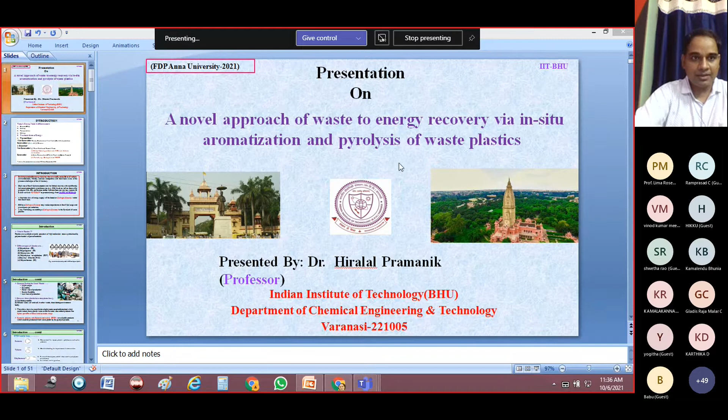Before I go to my topic, I would like to request permission to share my slides, ma'am, because I have a PPT. Thank you, ma'am. I'm sorry, I thought I had made you presenter. Now it is activated. All right, ma'am. I hope my screen is visible. Is it possible to make it full screen, sir? Yes, ma'am, I'm doing that. Is my PPT visible, ma'am? Yes, it's visible, sir. Okay.

So before I start my lecture, I'd like to thank Professor Lima Rose Miranda, ma'am, for giving me this opportunity to deliver this lecture in this faculty development program on material and techniques for the treatment of waste. I have selected this topic keeping in mind the theme of this FDP program, waste management. So I thought waste to energy would be a good choice. Basically, the waste here is plastic waste.

So the topic of my presentation is a novel approach of solid waste to energy recovery via in situ aromatization and pyrolysis of plastic waste.

So, when you are talking of waste management, there are many options. There are various types of waste generated, either domestic or industry, right? Domestic waste is basically considered as municipal solid waste. Industry also counts a lot, and all this waste pollutes either air, water, or land in various means based on the nature of the waste.

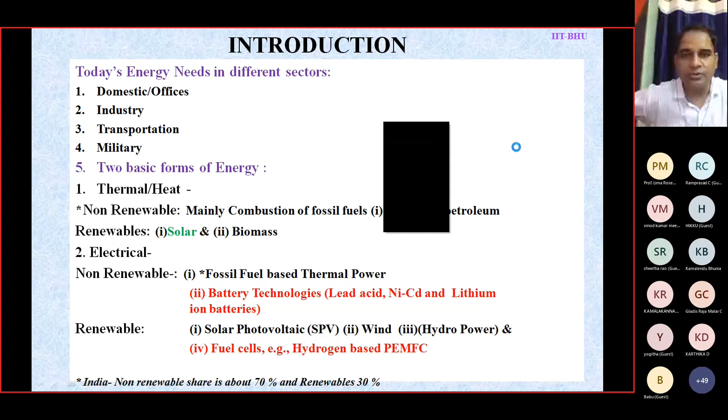So heat energy or thermal energy is basically derived from renewable or non-renewable sources. Non-renewable is basically the fossil fuels that we know: coal, petroleum, or natural gas. If you talk about renewable, solar or biomass: for solar thermal energy there are solar flat plate collectors and solar heaters used to trap the solar thermal energy. Similarly, biomass is a renewable form; we can have energy from biomass after combustion. So these are the renewable and non-renewable sources through which we can have heat energy.

The other form is electrical, again non-renewable and renewable in nature. Non-renewable is the fossil fuel-based thermal power plant. All this fossil fuel produces heat that can be converted to thermal power after generation of steam. Okay, the heat produced from combustion can be converted to steam, and then steam will give you thermal power.

Another is battery technology, that is lithium ion battery, nickel cadmium battery, rechargeable battery, that is, secondary battery. These are basically non-renewable in nature, because you have to recharge it to get back the electricity from the battery. But renewable in nature is solar photovoltaic electrical energy. If you want the renewable route, then SPVs are there, then wind energy, hydropower, right?

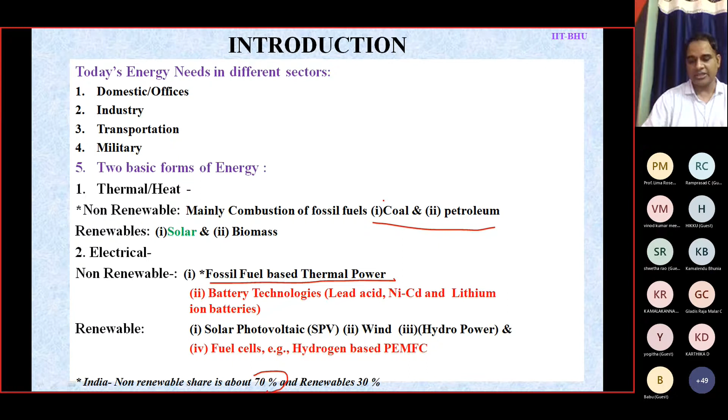Now in view of this, if you see that energy share, 70% non-renewable and 30% renewable, to reduce this dependency on non-renewable or conventional energy resources, devising sustainable energy resources is very essential, which is environmentally friendly and cost competitive with fossil fuel, and to devise such sustainable technology is really a big challenge in the 21st century.

We are talking of much research on renewable energy sectors like solar photovoltaic. Nowadays, due to the initiatives of the government, the use of solar photovoltaic has increased on a higher side. And the problem is with the cost. The government is giving subsidy. It's not that solar panel cost is low nowadays. Government is giving subsidy to promote solar photovoltaic.

So if you can produce the SPV on our own, the PN junction or material for SPV on our own, then cost will be reduced. Okay, so that's why the cost must be low. Reducing cost by giving subsidy is not a solution. The material cost has to be low, and of course it must be environmentally friendly.

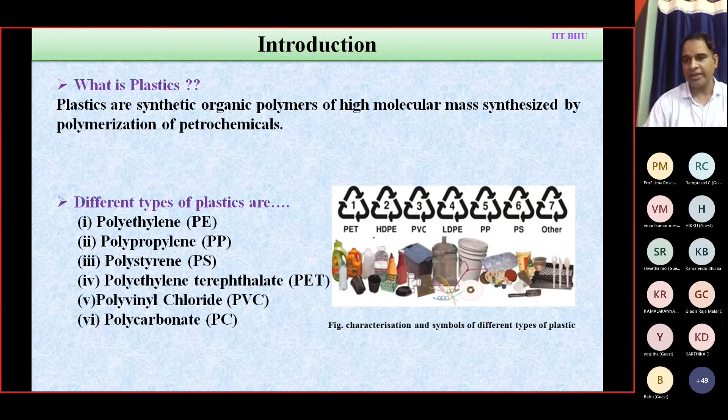The reasons behind the use of plastic, first of all, no doubt, lightweight, of course durability, faster rate of production, design flexibility, and low cost. These are the major reasons, five key reasons. That's why plastic is very much popular.

However, these plastics have many demerits. They are non-biodegradable, and as I have told, they pollute water, air, and soil, and of course damage our environment. If you talk about polystyrene, that is basically thermocol. It is manufactured from a monomer of styrene, and thermocol is used for cutlery, teacups, as well as plates.

These are basically thrown after use with municipal solid waste, and we have seen many times it floats on water bodies, not only ponds, you can see it in lakes as well as in the seas. It is found floating on the water body, and that pollutes the land as well as water.

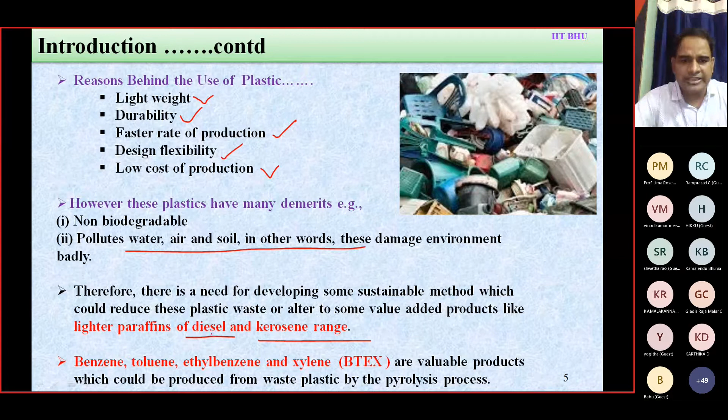Again we can break it down into smaller fragments, but if you simply supply heat and do thermal pyrolysis in absence of oxygen, it will give you random product distribution. You cannot have diesel and kerosene like fuel oil, or benzene, toluene, ethyl benzene, xylene like aromatics, which are valuable aromatic hydrocarbons. That's why I have added this term, pyrolysis and aromatization. Benzene, toluene, ethyl benzene and xylene will be produced.

Even if you analyze fuel oil like gasoline as well as diesel, we observe that benzene content is as low as possible. Why? Because benzene has soot forming properties, but toluene, ethyl benzene and xylene are considered good fuel components. For gasoline, they improve the octane number, right?

So that's why we thought, why not concentrate on conversion of pyrolysis products by in situ aromatization in the same process, right? By certain internal arrangements or modification of the reactor, we convert pyrolysis products to these valuable aromatics like benzene, toluene, ethyl benzene and xylene.

What are the uses of these four major aromatic hydrocarbons? Benzene is used for styrene manufacturing, phenol, cyclohexane, nylon precursor. Gasoline blending for improvement of octane number, as I told you. Ethyl benzene is used to manufacture styrene, which is then used for polystyrene manufacturing. Toluene is used as a solvent also, and in gasoline to improve the octane number. Not only toluene, ethyl benzene is also used.

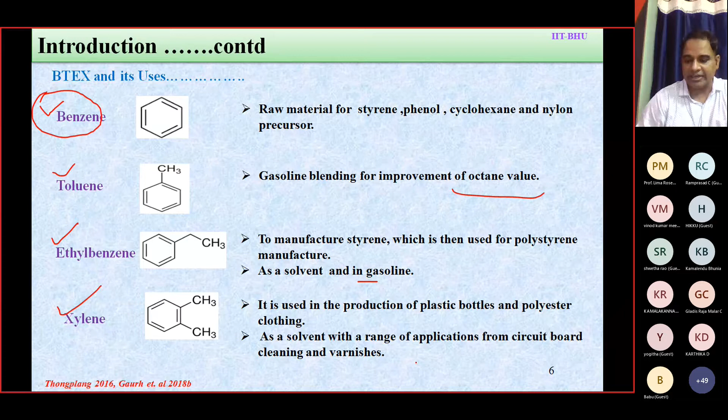Xylene is used in production of plastic bottles, polyester clothing, then as a solvent with a range of applications for circuit board cleaning and varnishes, etc. Its major use is as a solvent.

Now, if you see the current status of plastic waste disposal in our country, though this data is of 2013, this figure has gone up tremendously. Even per the 2013 CPCB report, 5.6 million tons per annum of plastic waste is generated, and only 10% is recycled; the remaining is used for landfilling and incineration.

Among these two, around 69-70% is used for landfilling, and incineration 10 to 12%. So landfilling is used for major amounts, right? In our country, we don't have a good management system to recycle it or to convert it into valuable products. I'm talking of plastic waste.

If you see the total waste, about 8 to 15% is basically plastic. So plastic waste contributes around 8 to 15% of solid waste, per Government of India 1997 data. That may be on the higher side now, around 20%, though I have not reported the present data here.

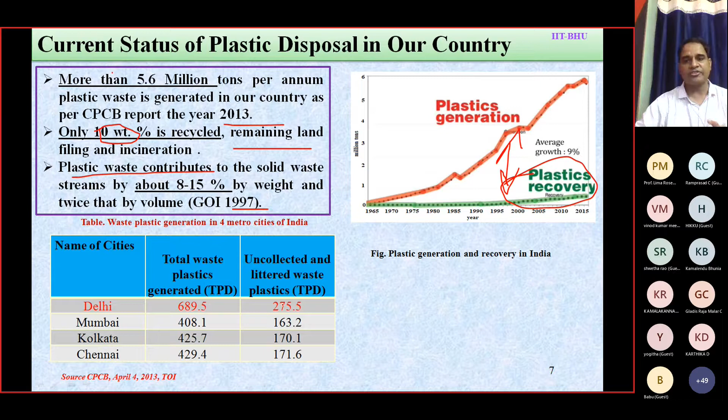And if you see the uncollected or littered plastic that is not collected, recycled or reused, it's a huge amount: 275 tons per day is littered or uncollected. So you can see there is a huge gap between plastic waste generation and reusing.

Now, I would like to give you data of Varanasi city. We are talking of the country's perspective and all; four major cities we have seen. Now, as I am from Varanasi and at IIT BHU Varanasi, I am much more concerned for our city. We talk about the world scenario, the country scenario, but we should know about our local place as well, where we are residing.

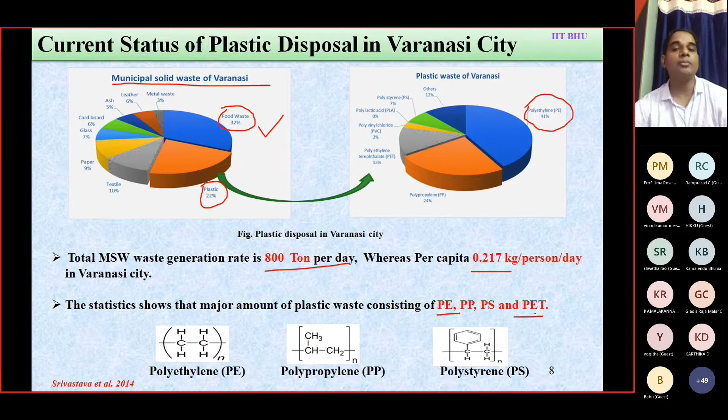Now, municipal solid waste of Varanasi, on a tons per day basis, 800 tons per day of waste is produced. It's a huge amount, and per capita 200 grams per person per day in Varanasi, a huge amount again. 200 grams of waste generation. The statistics show that the major amount of plastic waste consists of polyethylene, polypropylene, polystyrene and PET. That's why we concentrated on those 4 types. But again, we did some literature review on whether those plastics are possible to convert or not. I shall discuss that in the next slide.

Now think of the mountain areas. I have talked about the national scenario, then Varanasi. Now if you look at high altitude mountain areas, those areas are also not spared; they are also greatly affected, right? Mountain areas and major cities of India at high altitude. Plastic bottles are thrown by tourists, local residents and military people.

However, no studies on plastic waste generation at high altitude have been reported or found in open literature. Only some articles were published in 2018, like this headline: a Himalayan mess, growing garbage pile a threat to mountain ecosystem.

And this information: on World Environment Day, 5th June, volunteers of 200 organizations picked 4 lakh pieces of plastic waste in a 2-hour operation from Himalayan states like Sikkim, Meghalaya, Tripura, from north to north east, this region. If you see all the states, 4 lakh pieces, a huge amount, right?

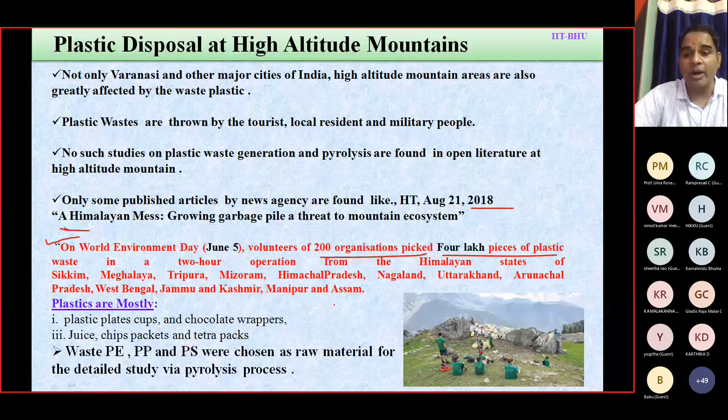So tourists, local residents and military people are the major threat, meaning they don't take care of proper plastic waste disposal. They throw it here and there. Most of the plastics are cups, chocolate wrappers, juice and chips packets, Tetra packs, etc. So here also PE, PP, and polystyrene are found. So not only major metropolitan cities of India, but also Himalayan areas are greatly affected. Okay.

So plastic waste management techniques: if you see the methods, landfilling, as I already told you, is a very high amount, 79%, 12% incineration, and 9% recycling. So the major amount is landfilling, and that has many problems: it requires large space, is non-biodegradable in nature, pollutes water and soil. The energy content in the plastic we cannot recover after disposal.

And the last point is very scary, because cows and dogs are often seen scavenging garbage dumps, which is harmful to animals. And many times we have seen cows die due to consumption of plastic with some food stuff, right? So that's why we have to reduce landfilling of this plastic waste as much as possible.

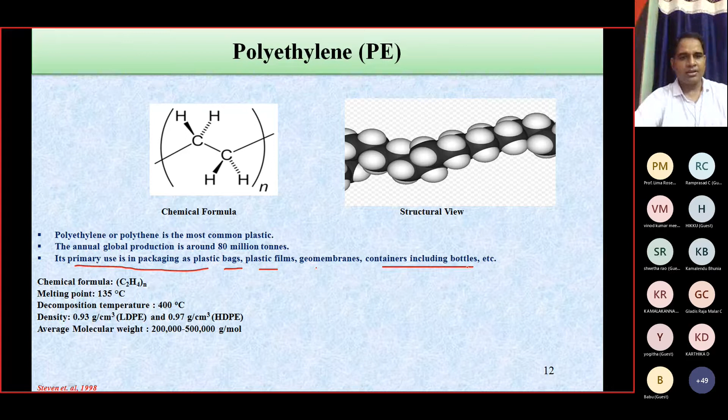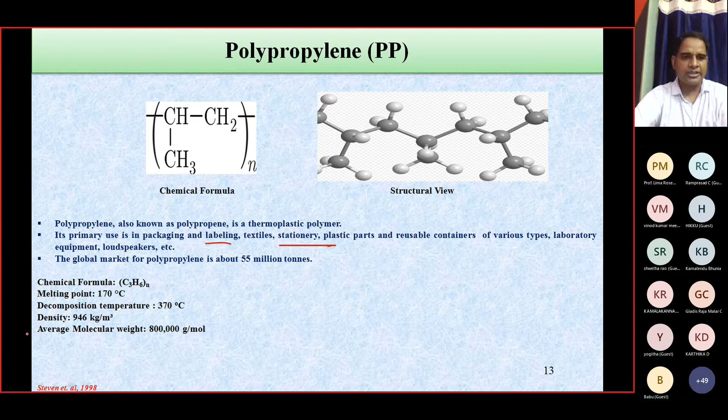As I have told, three major plastics are found: polyethylene, polypropylene, and polystyrene. So this is the structure, chemical formula, and the structural view. The products from polyethylene are basically plastic bags, plastic films, geomembranes, containers including bottles, etc. Similarly, this is the polypropylene structure. Stationery, textiles, labeling, packaging, and reusable containers are produced from polypropylene. And these are some properties of polypropylene, just like polyethylene.

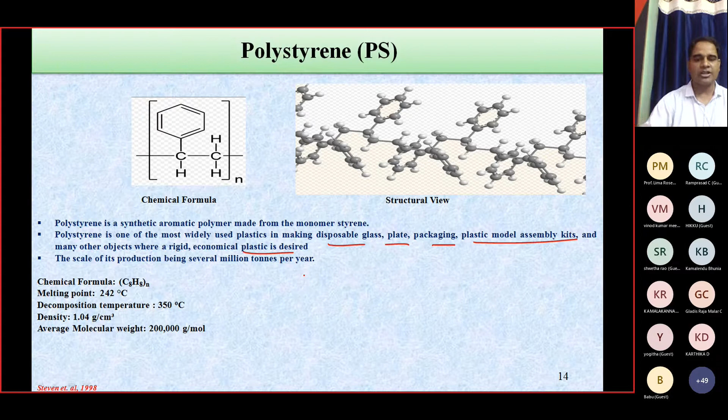Next is the polystyrene structure I have shown here. Disposable glasses, plates, packaging, plastic model assembly kits, and many other objects where a rigid and economical plastic is desired use polystyrene. When heavy, delicate items are transported from one location to another, we have seen thermocol being used. When electronic or delicate items are transferred, a large volume of this polystyrene is used for packaging, and that goes to the environment if you do not recycle it, reuse it, or convert it into suitable products.

What are the mechanisms of polymer decomposition? Pyrolysis follows four steps. First is the chain initiation reaction. If you have a polymer, there will be cleavage of bonds, forming radicals. The dot means it is forming radicals. So this is radical formation from the polymer, random scission. Next is the chain propagation reaction.

In propagation, the first step is depolymerization through beta scission, which gives this radical. This radical will be converted to a smaller radical as well as some unsaturated hydrocarbons. Another route also gives a radical with some unsaturated hydrocarbon. Intramolecular hydrogen transfer happens within the same molecule: the radical moves from this position to here, and a hydrogen atom is transferred to other carbon atoms.

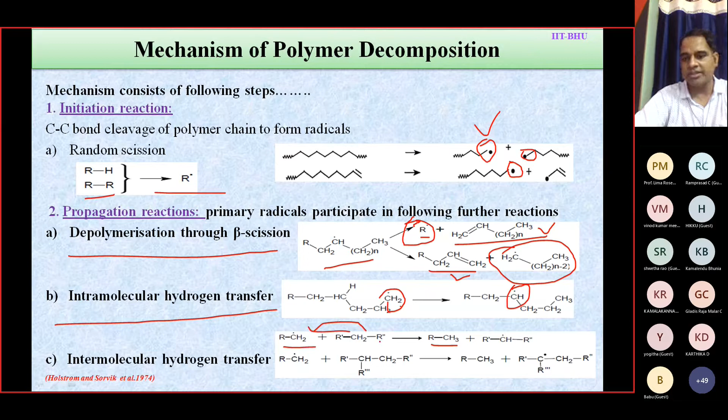In intermolecular transfer, two radicals rearrange and hydrogen transfer takes place. You can see CH2 has become CH3, so one hydrogen has been transferred from the second one to the first one. Next is chain termination. If there are two radicals, they will form another compound that terminates the chain, giving the final compounds through the different reactions shown here. I am not going into detail on that.

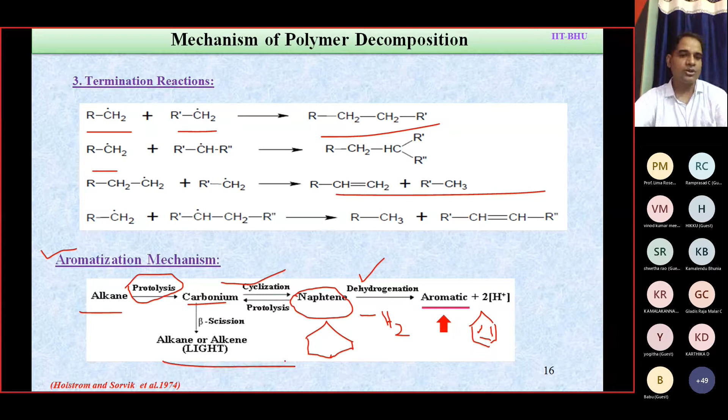For aromatization, if you have an alkane, protolysis takes place, giving a carbonium ion. The carbonium ion has two paths. First, cyclization then dehydrogenation. Cyclization gives a naphthenic saturated ring structure, a benzene-like structure but saturated, like cyclohexane. Dehydrogenation removes hydrogen and gives aromatic hydrocarbons, for example benzene. Or beta scission of the carbonium ion gives alkanes or alkenes, unsaturated hydrocarbons.

Next is the selection of plastic. We should know the basis for whether you can go for pyrolysis or not. Let's look into it.

Polypropylene is also good for pyrolysis and requires a little higher temperature, right? And thermal pyrolysis gives a waxy product, right? But we can manage using catalytic pyrolysis, right? We can have a good quality of oil. So polypropylene also is good for pyrolysis. And now

polyethylene terephthalate, that is PET, if you look into it, it is not suitable. Why? It produces benzoic acid. Benzoic acid solidifies at the neck or condenser line, which chokes the vapor path or vapor lines, and it is very dangerous, right? So from a safety point of view, it's not recommended for the pyrolysis process directly. Only after design modification it could be done. So polyethylene terephthalate gives benzoic acid, that's why it is not recommended.

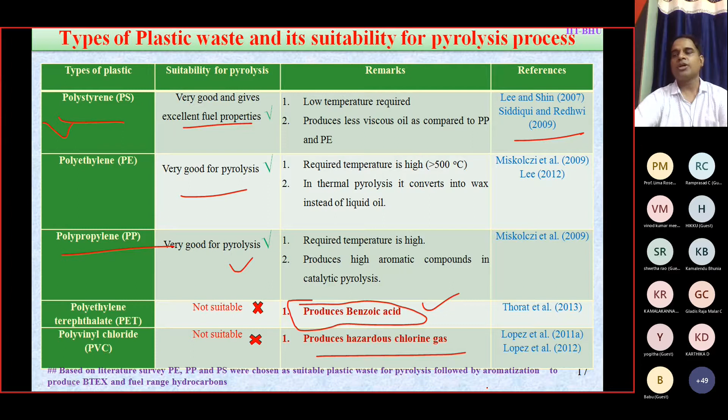Polyvinyl chloride produces chlorine vapor. Again, it is not recommended due to the escape of chlorine into the environment. So based on literature, as I've said, polyethylene, polypropylene, and polystyrene were chosen for pyrolysis followed by in situ aromatization to produce diesel range liquid hydrocarbon, along with some major aromatics like benzene, toluene, ethyl benzene, and xylene.

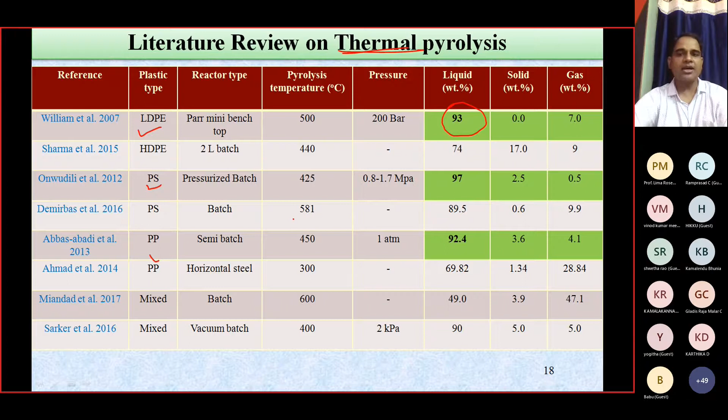So these are a few literatures. If you see here, it is mainly for thermal pyrolysis. I have highlighted with green color polyethylene, LDPE, polystyrene, and polypropylene. What is their output? As a liquid product, 93%, 97%, and 92%. More than 90% in each case, with a little amount of gas and a very small amount of solid residue. This is for thermal pyrolysis of these three types of plastic waste.

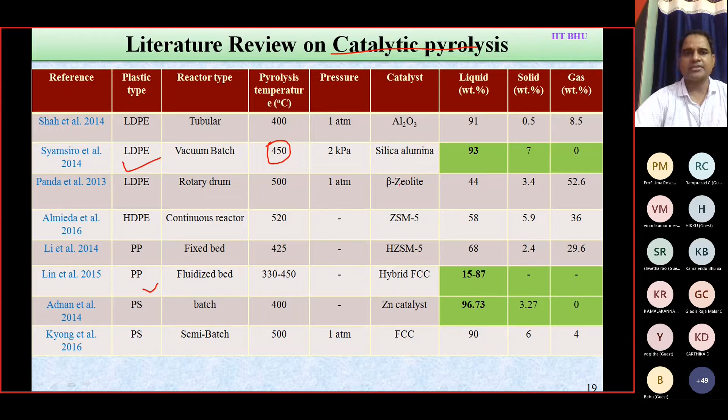Similarly, for catalytic pyrolysis, from the literature survey it is seen that LDPE, low density polyethylene, gives 93%, right? Pyrolysis temperature is 450, and then polypropylene, 330 to 450, and polystyrene, 400 degrees Celsius. All these are in degrees Celsius. And here you can see liquid also 93%, 15 to 87% for polypropylene. This range is given as available in the literature, and 96% liquid oil is obtained.

But this paper has not shown the qualitative analysis, that means in terms of benzene, toluene, ethyl benzene, and other hydrocarbons like paraffinic hydrocarbons and naphthenes, not shown. So only quantitative analysis is given here.

Now from this overall literature survey, we observe that there is good possibility of research on conversion of plastic waste to aromatic hydrocarbons, benzene, toluene, ethyl benzene, and xylene rich fuel, which is suitable for a generator set, because when those aromatic hydrocarbons remain in the oil, it is good for a diesel engine, right? But as I have already said, the benzene percentage is a little high, so we have to reduce that percentage either by some separation process or by some conversion technique, converting benzene to toluene using a suitable catalyst or reactor bed arrangement.

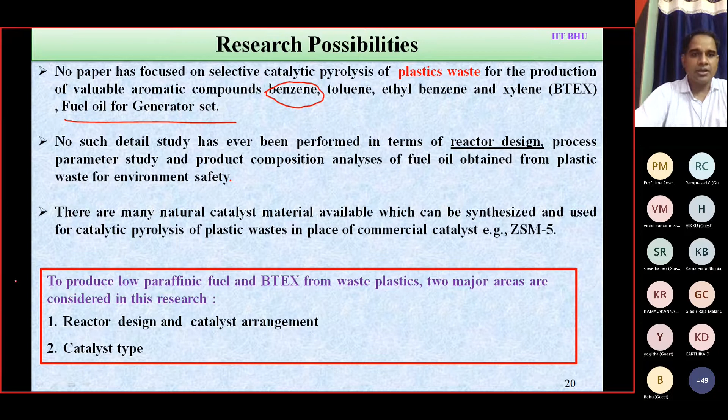Second, there is no detailed study on reactor design; process parameter study and product composition analysis of fuel oil obtained from plastic waste has not been shown yet, right? In terms of reactor design. The third one is there are many natural catalysts. ZSM-5 is the widely used commercial catalyst, but apart from ZSM-5, there are many natural materials which could be recommended as a catalyst for pyrolysis or aromatization.

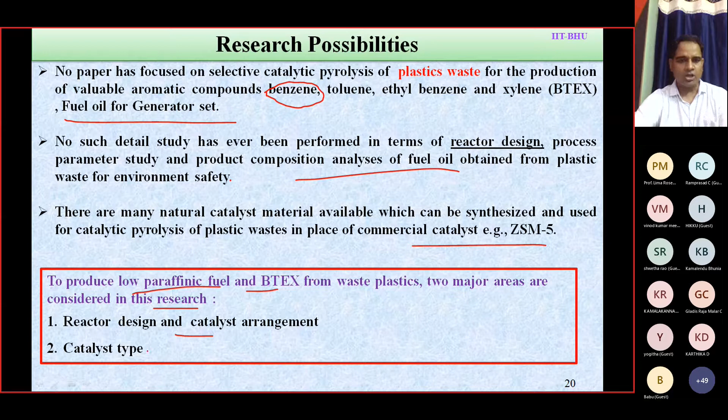So therefore, to produce low paraffinic fuel and BTEX from waste plastic, two major areas are considered in this study. One is reactor design and catalyst arrangement, and the second one is catalyst type. By modifying the design and catalyst bed arrangements, we observed a huge enhancement in the BTX content in the oil as well as the quality of the oil. And we tested catalysts, not only commercial, but also some natural materials we selected. I will discuss this in the experimental section.

So what are the objectives? Each research study must have objectives based on the gap we found from the literature and on our specific goal: design and fabrication of the setup, and then study both thermal and catalytic pyrolysis for comparison purposes.

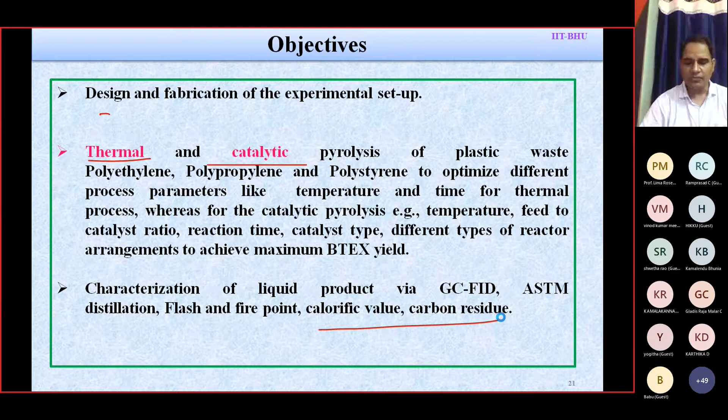If you don't have thermal pyrolysis data, then you cannot compare what is the enhancement in yield as well as quality in terms of BTEX. Then product characterization using various standard techniques: GC-FID, ASTM distillation, flash and fire point, calorific value, and carbon residue. These tests are also recommended for diesel oil or gasoline to compare with the standard data, whether it is a standard fuel or whether there is some mixing, impurities or adulteration.

Two major raw materials were used here: one is plastic, of course, and the second one is catalyst. Plastic, polyethylene, I have already told. What is the preparation of the feed raw material here? Collection, washing, drying, and shredding for pyrolysis, and the catalysts used were ZSM-5 and fly ash synthesized catalyst, or red mud and river clay. I shall discuss only fly ash here because of time constraint, as well as ZSM-5.

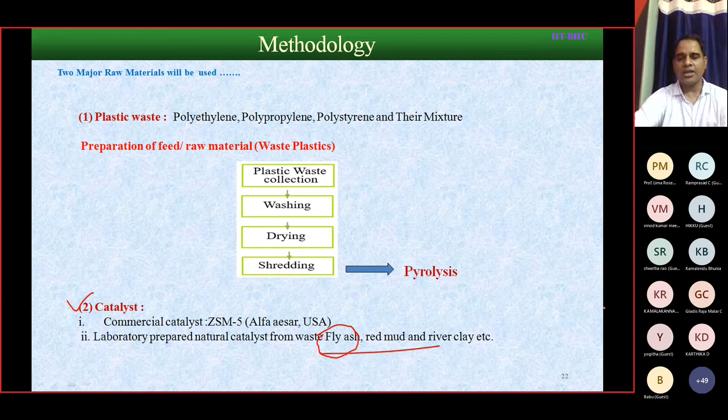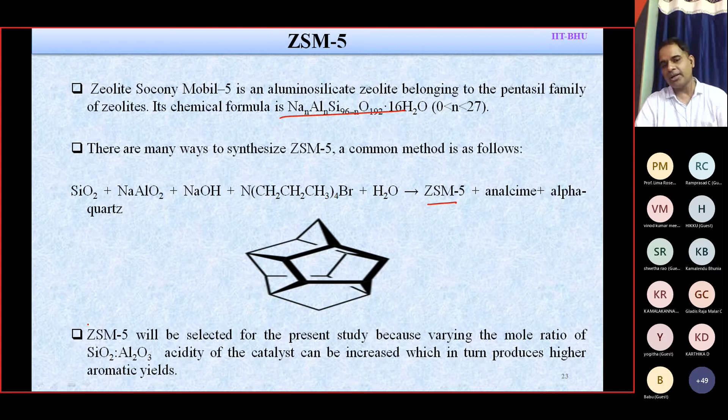Nowadays, ZSM-5 is being modified with ammonium chloride to protonate it, which is known as HZSM. So Na is being replaced using ammonium chloride in the form of NH4, which is known as HZSM-5, to have better aromatization, better alkylation and more selective products, target molecules in the process. The ZSM-5 we selected here has a fixed ratio, because with changing silica to alumina ratio, acidity basically changes. So the silica alumina ratio is also considered an important parameter.

Now for fly ash, we selected it as a raw material for catalyst synthesis or silica alumina synthesis because 184 million tons per annum of fly ash is produced from thermal power plants. The 2014-15 data shows 184 million tons, a huge amount of fly ash, in the Indian scenario. And maximum fly ash generation is in Uttar Pradesh, 24.37 million tons per annum. These are the references taken.

Keeping this in view, we collected fly ash from Panki thermal power plant. If you see the composition of raw fly ash, silica is the highest amount, 53.56, then 27.71 is the second highest amount of active constituents. Then Fe2O3, also considered a good catalyst, and MgO. These are the four constituents which play a good catalytic role. But the first two, silica and alumina, as you have seen in zeolite, so we considered silica alumina mainly as active components for the catalytic conversion.

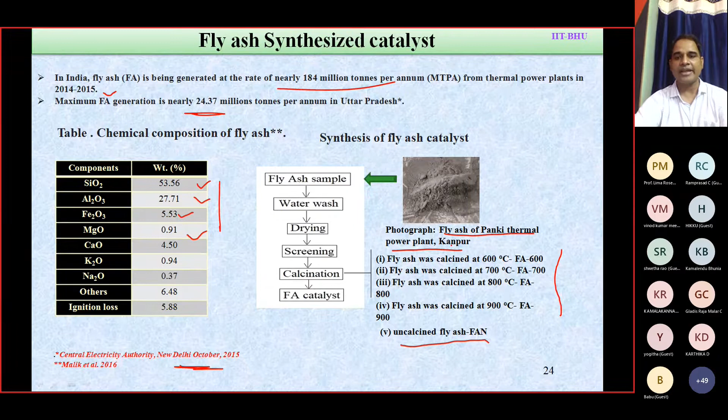What are the characterization techniques? Both the product oil and the catalyst were characterized. Catalyst characterization was done by XRD, SEM-EDAX, BET surface area and FTIR. XRD tells about the crystallinity of various active components present in the fly ash. SEM-EDAX gives information about surface elemental composition, what weight percent of silica, alumina and active constituents is present at the surface. BET gives the surface area in meter square per gram.

And from this we can interpret this physical characterization data with the products. It is presumed that if surface area is high, it is expected to give a better product, as there is better interaction, in terms of liquid or quality. Of course, catalytic pyrolysis will give you a little lower liquid yield, but quality-wise it is best for catalytic. Similarly, if you talk about gas, gas will be high for catalytic pyrolysis.

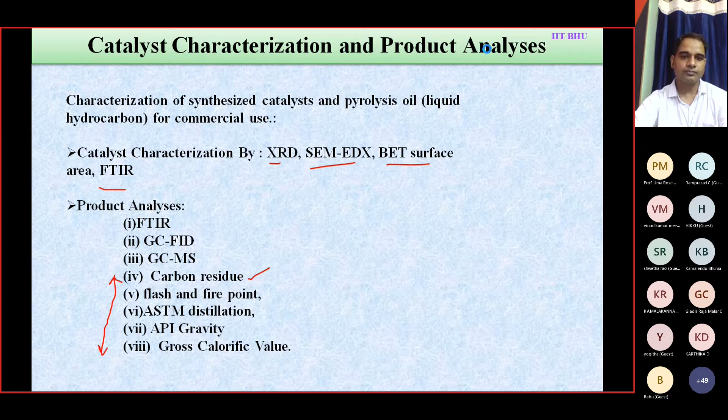Next, let us discuss the experimental setup and how we design the reactor. Many times we do the research, but we do not follow the design criteria. Simply we see the literature, fabricate the setup and do the experiments. But for any sort of reactor, we have a design criteria. So here, based on L by D ratio, residence time of the reactant and products is very, very important.

So L by D ratio we basically selected based on the various merits and demerits of the L/D range. If L/D is 0.5, then restricted flow and restricted recirculation within this reactor. If L/D is greater than 1.5, then it increases the path of recirculation. If L/D is greater than 2, then several disadvantages we can have; at least 2 impellers are required for good fluid motion. Thus we selected an L by D ratio of 1.2 to 1.5 here.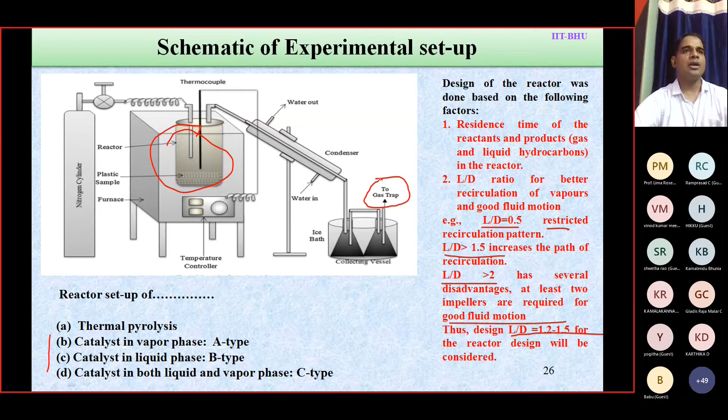So there is no chance of loss of condensable vapor as liquid hydrocarbon. The non-condensable gas was not analyzed, but it was trapped, and we have seen that it has a fuel value. It burns with a blue flame, as we observed when it was burned. So it has a calorific value and fuel value, because it is basically a mixture of methane, ethane, propane, butane, the lower hydrocarbons. So this is the reactor arrangement.

Now I would like to discuss the results and discussion part, a very interesting part. What are the products obtained from the pyrolysis of polyethylene, polypropylene and polystyrene using the thermal pyrolysis process? The second part is the same using catalytic pyrolysis, using ZSM and using fly ash, both of which we have discussed in two different subparts.

Now polyethylene: if you look into this table, what we observed during our research is that with the increase in temperature, 500 degrees Celsius, 600, 700 and 800 degrees Celsius, with a sample weight of 50 grams of plastic waste, polyethylene, at 800 the yield was very high but waxy. The yield is higher than at 700, 600 and 500, but it is waxy in nature and solidifies at room temperature.

For gas, you can see there is a little bit of fluctuation: 18, 20, then 16, and again 18.4. Why is it 18.4 again? Because of repolymerization in thermal pyrolysis, we observe more solid at very high temperature. And why is it waxy after 700 degrees Celsius, that is, at 800 degrees Celsius?

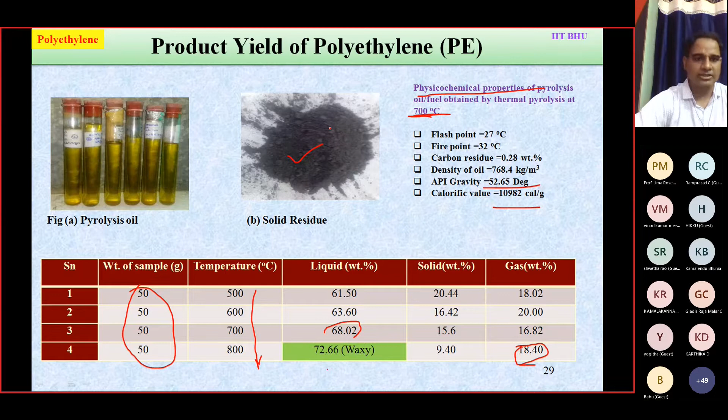From this you can say it is a light oil, because API gravity greater than 31.1 means it is basically a light oil. And the calorific value is also good; the calorific value of gasoline comes in the range of 11,000, so here it's very close to gasoline, even though it is thermal pyrolysis, maybe because we maintained the L by D ratio properly. This is the solid residue, not catalyst, left over after pyrolysis, and this is the pyrolysis oil at 700 degrees Celsius.

Similarly for polypropylene, at 800 the yield is again quite high, higher than polyethylene. We got 86% liquid oil here, but the problem is that at this high temperature it is again waxy. I have discussed the reason: because of the high temperature, the vaporization rate is higher, so it goes into the vapor phase and then to the condenser without further conversion.

However, at lower temperatures, 700, 600 and 500 degrees, they get sufficient time for further conversion. That's why we get a little higher liquid oil at 700 in comparison to 500 and 600, and it is liquid in nature; the oil is not waxy at 700, and similarly at 600 and 500. That means lower paraffins are present in higher amounts in these three types of oil.

Okay, but if you see the BTX analysis, thermal pyrolysis is always giving low BTX content in comparison to catalytic pyrolysis, which I shall discuss in the catalytic pyrolysis section in comparison with thermal pyrolysis. So 700 again is the optimum temperature.

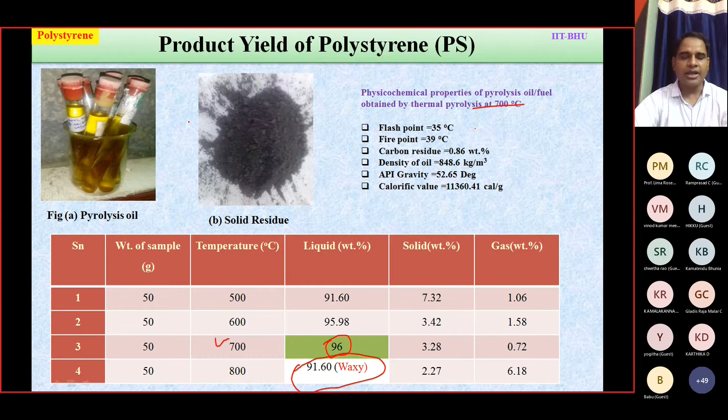But the color, you can see, is a little more brownish because of the styrene monomer. What we have observed in thermal pyrolysis of polystyrene is that it mostly gives the styrene monomer, and the monomer remains in the product oil. That's why its color becomes more brown in comparison to oil obtained through pyrolysis of polypropylene, meaning dark brown, and that is the light brown polyethylene, and you can see polypropylene is almost clear, right? Water-like color.

So catalytic pyrolysis, if you see the catalytic pyrolysis with ZSM5 first. Before we went for the catalytic pyrolysis, we took 50 grams of feed total, and maintained feed to catalyst ratios of 10:1, 20:1, and 30:1 for each, starting with polyethylene. Then what we observed was that liquid yield was 58%, the highest percentage here in the catalytic pyrolysis, for 20:1. Here also 81%, and 86% for polystyrene. So as the liquid yield was highest for 20:1, we took it as the optimum feed to catalyst ratio for catalytic pyrolysis using ZSM5.

Okay, all three comparisons I have shown here. If you compare with the thermal, you can see that the gaseous percentage is increased, and we know naturally the gas obtained is higher in the case of catalytic pyrolysis in comparison to thermal.

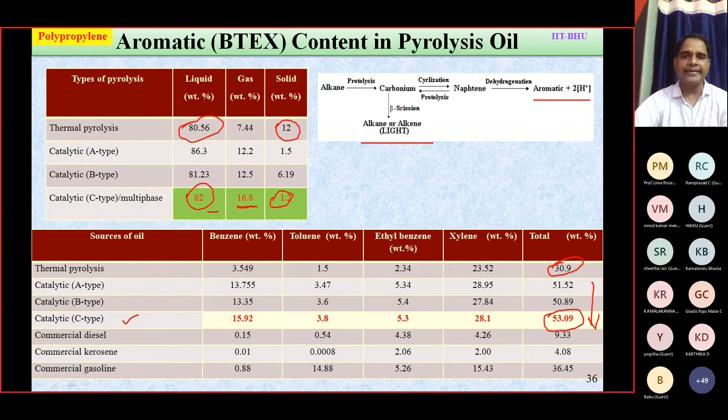So already the reason for such change I have discussed, and this is the reaction: alkane to carbonium ion due to the protolysis, then cyclization, dehydrogenation will give you aromatics, and then alkane or alkene, light alkane or light alkene due to the beta scission. Already I have discussed this, how we are getting these different types of aromatics.

Similarly, polystyrene gives 96% liquid yield here, and if you compare with the C-type multiphase, 83%. Though liquid yield is low, quality-wise it is good, because you see 26.86%, the highest amount of aromatics BTEX, is found in comparison to thermal pyrolysis. For it, it was 96%, but BTX is low, only 13.58. If you do multiphase pyrolysis, liquid and vapor phase, then 26.86%, it becomes double.

And liquid is, I told you, low because it has been converted to gas. Gas means valuable fuel gas, and that can be recommended as a fuel. Before I go to the catalytic pyrolysis, I'd like to highlight one thing. The gaseous fuel which we are getting from the catalytic pyrolysis of C-type is a very high amount. And that gas can be used after trapping as a fuel, store it and use it as a fuel,

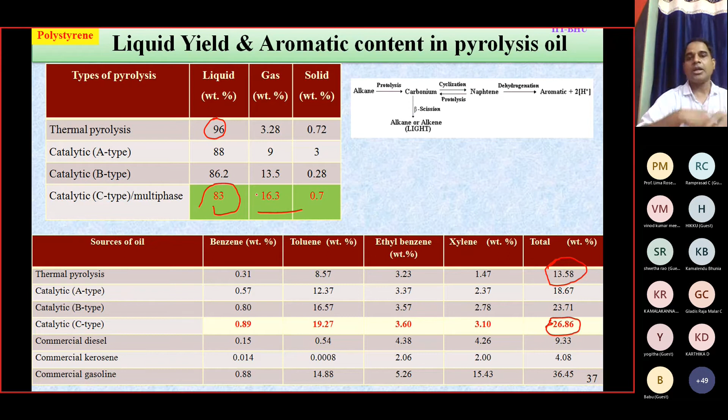or this gas can be used as a fuel for combustion, and the heat which will be generated can be used for pyrolysis of this plastic waste. So this process will be sustainable and self-sustained, this technology. No need of an external heat source. The fuel gas which you are getting, you burn it and use it in the system for the multiphase pyrolysis. It is the best process, so I recommend it for multiphase pyrolysis of plastic waste. Okay, so a self-sustained process.

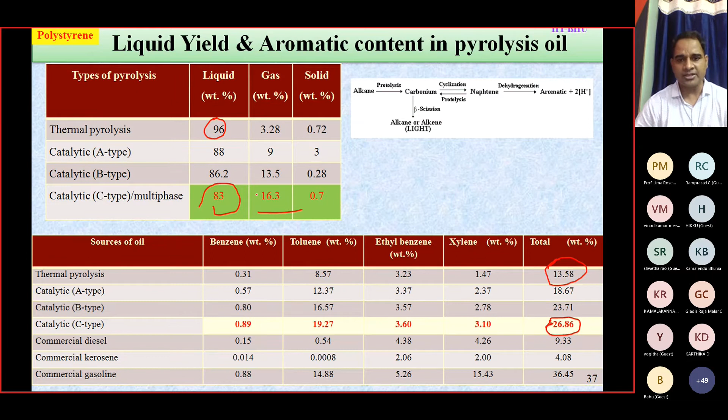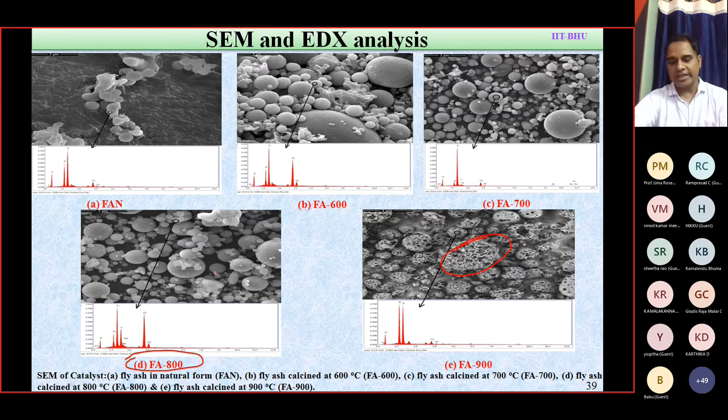So what conclusion can we draw from this? 800 degrees Celsius is the optimum temperature of calcination, at which surface area is high, as well as there is no pore collapsing; though pores are not visible, pores are there. And that's why the pore volume is high, and silica alumina ratio is high. So let's see this analysis: surface area, pore volume, average particle size, silica alumina ratio. Let's compare 800 and 900 with 600 and the natural catalyst. For ease of convenience, for a better comparison, compare these.

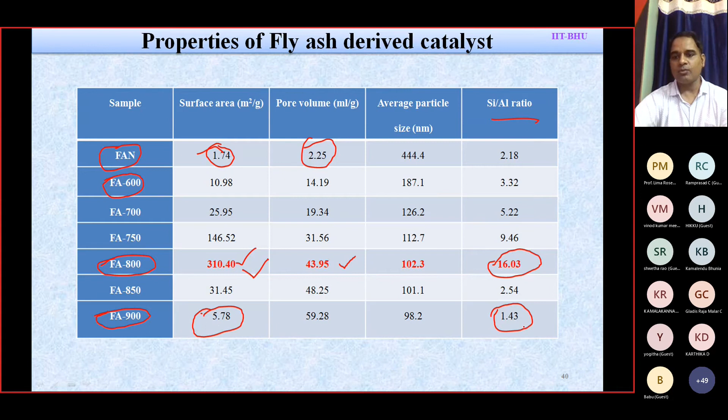Now if you do the study of pyrolysis, similar arrangements for all three catalysts, five types of catalyst: four calcination temperatures and one uncalcined natural catalyst. So A, B, C type. So if you compare four catalysts for 800 and C type, four catalysts of different calcination temperature and C type. So here it is C type.

If you take this one C type, and this one C type, here also we are talking of multi-phase as the best one. So 0.19 is the benzene here, and here you can see 3.05 and 6.36 is the highest benzene content, and also you can see 7.95 is the highest toluene percentage, 5.57 ethyl benzene is also highest, and 2.21 a little increment.

But you can see that 800, if you compare this value and this value, C type with thermal pyrolysis, you can see this is always the highest amount, 800 calcined and C type, right? Calcined at 800 degrees Celsius and C type. Now total BTX content is 22.11 percent here. Here you can see 10.92 percent in the thermal pyrolysis, and I have shown already for polyethylene.

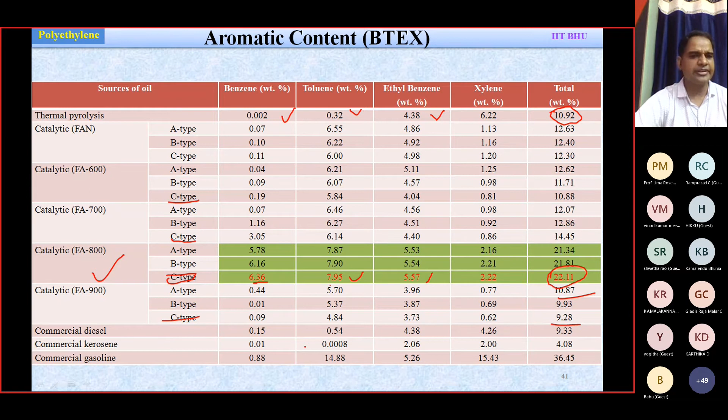So although not very close to ZSM5, it is giving higher aromatic BTX content in comparison to thermal pyrolysis, and 900 is giving lower, 9.28, very close to thermal pyrolysis. No increase in BTX content was found. Again, in every case I have shown the references diesel, kerosene, gasoline for better understanding of the BTX content in those three standard fuels and what BTX we are getting in our process.

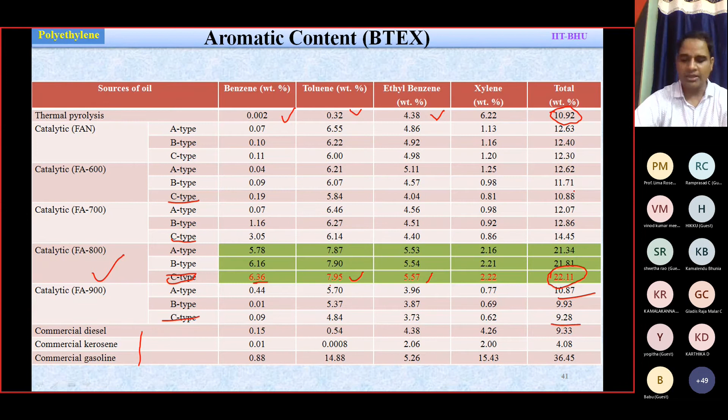Now, we also performed catalyst stability and regeneration. It is a very important part. We did a first run, second run, and third run. Then we stopped and observed the change in yield after the first run without regeneration. So this is a fresh catalyst. You can see this is used catalyst, right? After, let's say, the first run, and then regenerated.

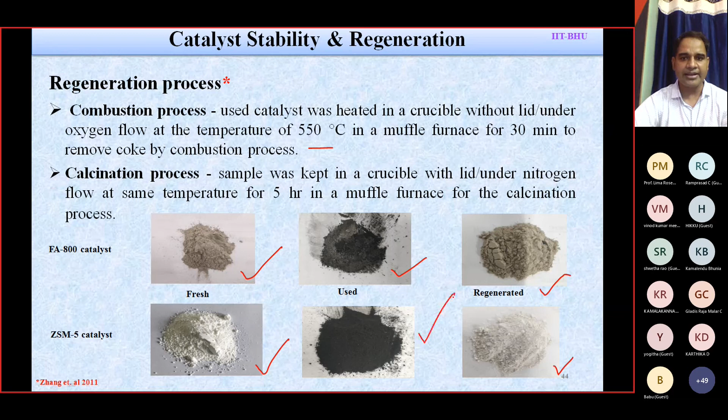How was it regenerated? The catalyst was calcined for 5 hours at a temperature of 550 degrees Celsius, and then all the carbonaceous part was removed, and we got this white regenerated catalyst, very close to the original catalyst. And similarly, ZSM5, here you can see the regenerated catalyst, and this is the used catalyst. So all these three types of catalyst you have seen, they are the same images.

Now see the BET surface area analysis of used, fresh and regenerated catalyst. The F800 fresh catalyst was initially 310, and regenerated 305, very close, but the used one has gone down to 215. Similarly, ZSM5 400, used one 312, gone down. After regeneration, 400 and 390, only 10 square meters per gram difference. There is still coke deposition which has blocked the pores. That's why we got this type of observation.

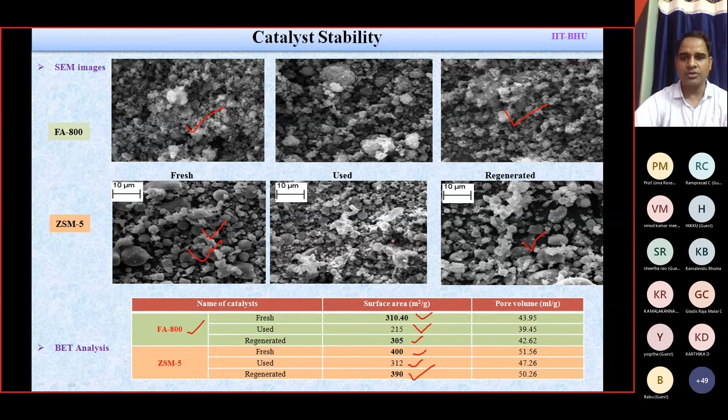And if you see the images, this is fresh and regenerated, very close, and the used one, though we cannot differentiate. For ZSM5 we can make a little comparison: fresh and regenerated, and this is the used one, where carbon deposition is clearly seen and the particles are not visible because of the deposition of coke.

After the experiment, what we observe using this regenerated catalyst. The first run, A type and C type. Let us compare the C type, the liquid one. This is C type, and C type here, and C type also. What is the difference? First run, second run, third run, and fourth run for F800, and after the fourth run it was regenerated. So what change can you find? First run, C type, and here C type, there is a change. Then it is decreasing.

Once we regenerate the catalyst and reuse this regenerated catalyst and fresh catalyst, there is hardly any difference. Same type of liquid we observe. Similarly, in BTX content, fresh and regenerated are very close. So ZSM5 also, if you look into it, 46% we are getting liquid yield here, and regenerated giving 46, same amount. But if you look after the third run, without regeneration, it's gone down to 43.72.

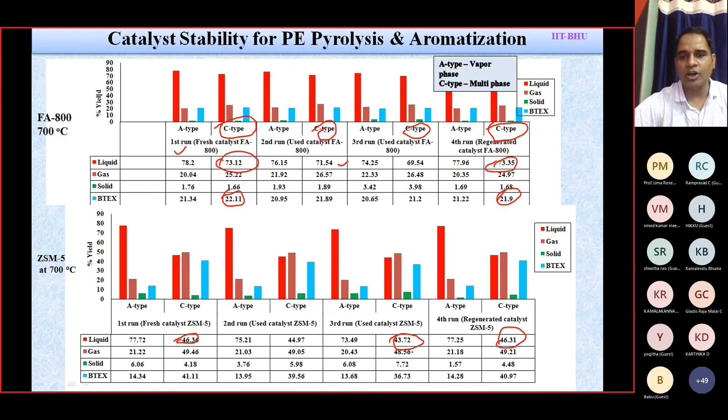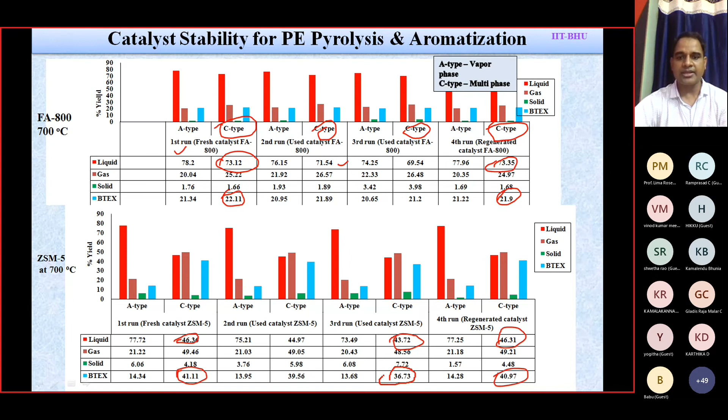Similarly, for the BTX content, here you can see almost the same, regenerated and the fresh one. But in between, let's say the third run, there is a lower BTX content. So in conclusion, I would like to conclude the main observations or outcomes of this process using these three plastic wastes.

So maximum yield and aromatic content, what we observe for thermal pyrolysis: polyethylene 68%, and aromatic content 10.92. For polypropylene 86% liquid yield, and this is BTX content. And polystyrene 96% and 13.57%. This is aromatic content. Similarly, maximum BTX content for catalytic pyrolysis using multiphase, I am talking of multiphase only, and FA800 catalyst.

Which is around 22.11% for polyethylene, 43.43% for polypropylene, and 20.93% for polystyrene. Whereas ZSM5 catalyst produces 39% for polyethylene, 53% for polypropylene, and 28% for polystyrene. So we can compare here among these two catalysts as well.

The test result for catalytic stability indicates that commercial ZSM5 and synthesized FA800 catalyst are stable up to the third run, and there is slight change in liquid yield and BTX content. Regenerated catalyst showed similar results as that of fresh catalyst. So regeneration is a must to make the process economically viable and cheaper.

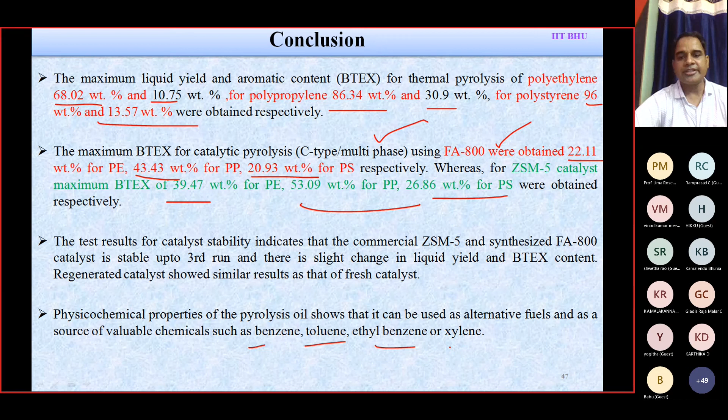Physicochemical properties of pyrolysis oil show that it can be used as an alternative fuel and as a source of valuable chemicals, as I've already said at the beginning, benzene, toluene, ethylbenzene, and xylene.

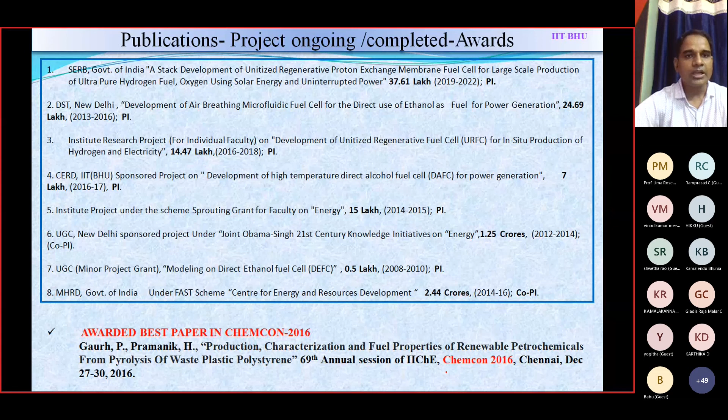So these are my ongoing projects. I have not shown here the publications; there's a long list of publications. These are ongoing projects and completed projects. And we got a best paper award in ChemCon 2016 for this work, production, characterization and fuel properties of renewable petrochemicals from pyrolysis of waste plastic polystyrene. These are the latest publications, 2021 and up to 2019, mainly on pyrolysis.